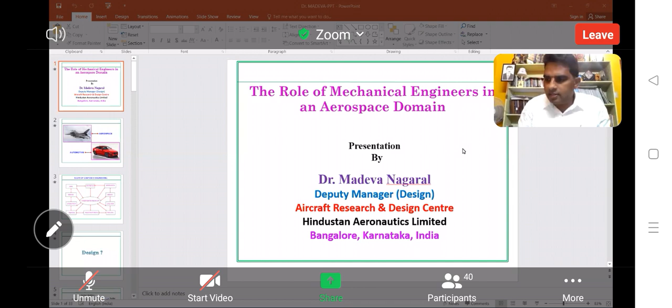You can see my presentation. As the name itself indicates, the role of mechanical engineers in an aerospace domain. If you see this term, what our mechanical engineers are going to play in the development of an aerospace product.

If you take any domain, not only aerospace, but automotive sector, or plastic domain, or any industry, from mechanical domain to the software domain, what are the different components you are seeing? Right now you are using maybe a laptop or mobile, you are sitting on a chair, or you have kept your laptop on the table. Whatever it may be, you take any component, our mechanical engineers are going to play a huge role.

So in this particular presentation, I have taken a comparison between the aerospace and the automotive sector, how our mechanical engineers are going to play a huge role to make any aerospace product, or it may be automotive sector. And whatever you are studying from the first semester to the 8th semester, different types of subjects, different types of domains.

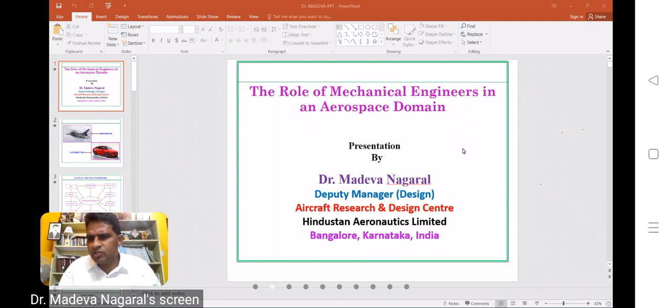How we are going to play a huge role to deliver that particular product to the customer, and what are the different steps involved, everything we are going to discuss in this 1 hour to 1 hour 15 minutes technical session. I hope this session will be useful for our young mechanical engineers, especially those who are interested in design field, manufacturing field, or testing. That means it is going to cover all aspects of the mechanical domain.

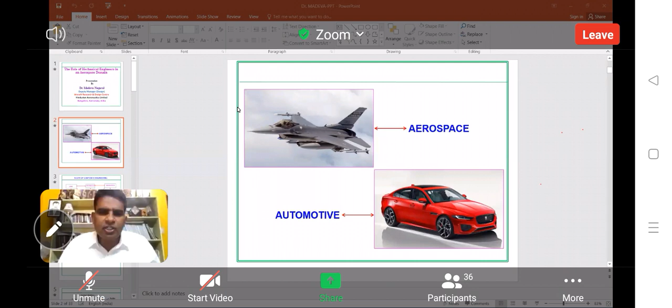So if you see this second slide, sir, is it visible? One aircraft as well as one car. Yes sir. Now if you see here, two different types of products are there. One product is related to the automotive sector, you can see this Jaguar car, and one more product is related to this particular F-16 aircraft.

Now, customer is going to give an order to a particular aerospace domain or aerospace industry in such a way that he needs these kind of 100 aerospace products with certain requirements.

For example, when you are going to shop to purchase a mobile, ultimately what are young engineers or young mechanical students going to see? They are going to see whether that particular mobile is having this much GB or not, around 256 GB, or 8 GB RAM is there or not. What about the screen? Screen size is only normal, or it may be bigger size. Like that, you are going to check. So if that particular mobile meets your requirements, then only you are going to purchase, otherwise you are not going to purchase. You are going to see other mobiles or visit other shops.

Like that, whenever a customer is going to place an order, he is going to have his own requirements. That means he is going to give his conditions in the purchase order. That means when he wants these kind of 100 aerospace products, he is going to specify three important terms.

Throughout this session, we are depending on three important terms. The first important term is the speed at which this particular aerospace product has to travel. This is one important thing.

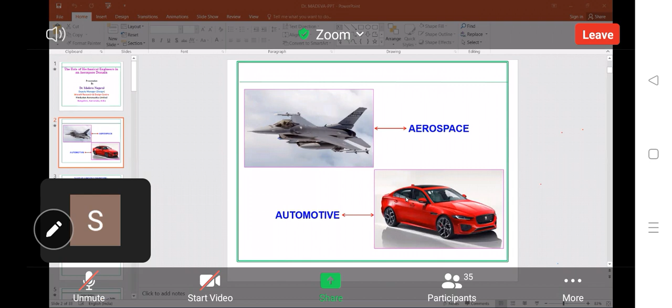If not available in that particular industry, say they have one aerospace product capable to travel at 1500 kilometers per hour, up to 8 hours, with a mass around 8000 kg. So they may have different products, but whatever the customer has asked for right now may not be there. So ultimately, at that time, this becomes the new project for that industry.

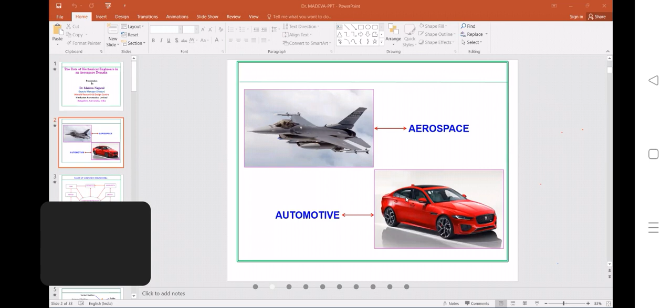How to begin, how to start this project is very important, where our mechanical engineers are going to play a very important role. Now your role is to develop an aerospace product capable of traveling 2000 kilometers per hour continuously for 6 hours, with the entire product mass not greater than 10,000 kg. Now this one is in your hand, you have to develop and deliver it to the customer.

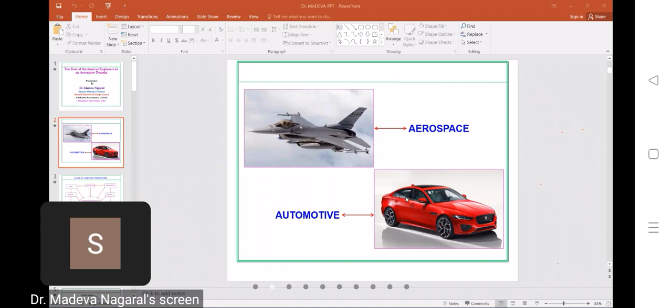Maybe the project time may be 5 years or 6 years, because aerospace products always take more time compared to the automotive sector, because whatever products are developed with respect to the aerospace domain ultimately require a lot of testing.

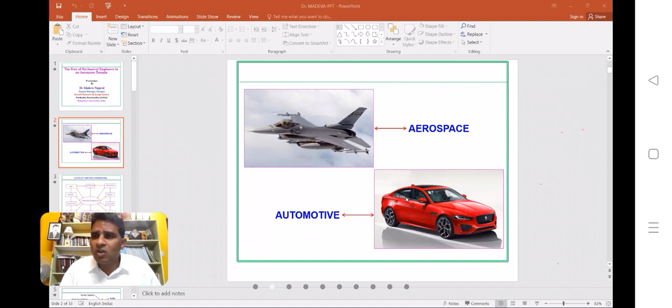We can't test simply like we do in the automotive sector, because in automotive, if something happens to the car, bike or moped, whatever it may be, we can park aside on the road and check. But in the aerospace domain, it is not like that. So a lot of factor of safety is required, and a lot of critical testing methodology needs to be followed.

So ultimately, the development of these kinds of aerospace products is right now in the hands of mechanical engineers along with aeronautical engineers. If you take any aerospace industry, out of 100 engineers, 90 will be mechanical engineers, and 10 maybe other engineers including computer science, aeronautical, electrical, or other branches. So our 90% mechanical engineers are capable of developing each and every component of this particular aerospace product.

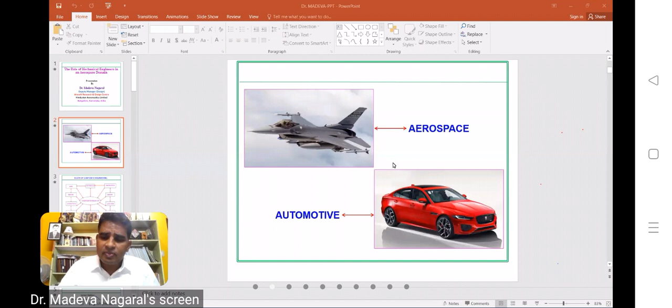That's why when it comes to the development of these kind of aerospace products, you can see this important chart. Here you can see a middle composite product, which you can think of as an aerospace product, like the F-16 we saw in the previous slide. Our aim is to develop this aerospace product, and to do so, ultimately there are a number of different parameters involved.

Those who are in 8th semester, those who just entered 7th semester, those who entered 3rd semester, and those who have just taken admission for 1st semester - you can see first semester students find this very difficult. Right now those in 7th sem and 5th sem might have seen all these terms.

Materials, as studied in material science and material testing lab, mechanics, kinematics of machines, theory of machines, and you might have linked this with strength of materials or mechanics of materials, then design 1, design 2, or design of machine elements, and a number of analysis subjects.

You can see analysis subjects - it may be ANSYS, FEM, or vibration - and meanwhile you have labs covering tooling, manufacturing processes, manufacturing, testing, inspection, repair, MBE. These are all important terms that we in industry regularly use to make this product.

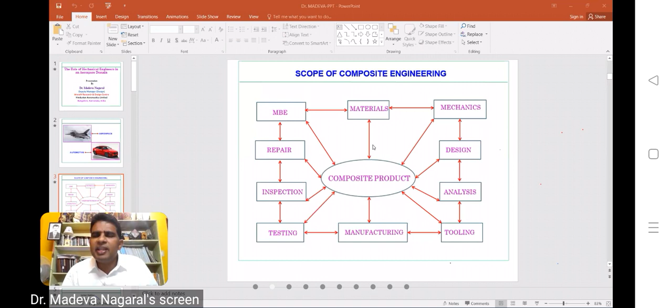Whatever subjects you are learning, from simple engineering graphics to your 8th semester, any quality related subject or any other subject, each subject has its own importance in making this end product, which is capable of traveling at 2000 kilometers per hour continuously for 6 hours. That's why you should not neglect any subject.

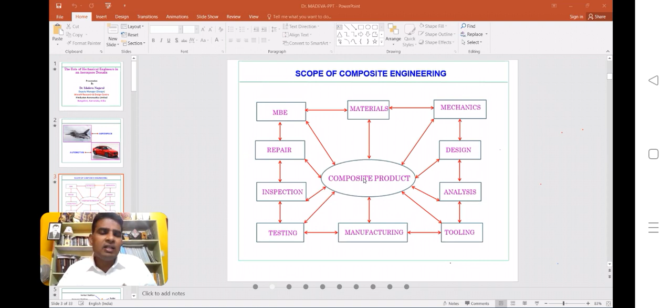You should study not only for the purpose of marks, but for the purpose of the nation's growth. Whatever you are studying right now, that same concept you are going to apply to develop these kind of components.

If you look at materials, you should know at least the density of each material. If I select to develop this kind of product using aluminum, what is going to happen? If I select to develop this fighter aircraft using steel, what is going to happen? You should be aware of that.

At the initial stage, if you start using steel, what is the density of steel? 7,800 kg per meter cube. When making the entire aircraft with steel, what is the condition the customer has given? The customer wants this aircraft supplied within 10,000 kg. If you use steel, it's going to reach a minimum of 30,000 kg.

You should be aware of this basic concept by studying important parameters in material science and metallurgy, and the same applies to mechanics of materials - what different types of loads act at different zones, and which type of kinematics I need to use to operate the landing gear of that particular aircraft.

What about the wing root fittings, where we can attach the wing root fitting, and which type of root fittings we can choose for the best design - everything depends on whatever subject you are studying. That's why each subject is going to have its importance in developing this kind of aerospace product.

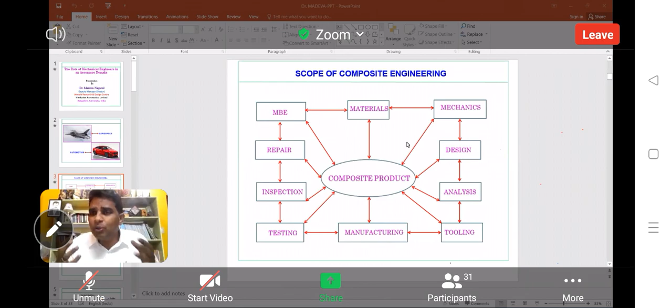Ultimately, our mechanical engineers studying this subject are going to play a huge role in making this particular product. We are going to discuss those things in the coming slides.

If you look at this particular design, as you are aware of any component design - take this simple pen design - ultimately it's based on which type of material you use or which type of design approach you take. If you see this pen tip or refill tip, when you put pressure while writing, 100% you are putting some amount of pressure on it. That pressure on the paper, with the help of this tip, should not deform it. When this tip of the refill deforms, you are unable to complete that process. You should be aware of that.

One minute, sir. Yeah sir. Excuse me sir. Recording on. Sir, is it audible, sir? No issue, sir.

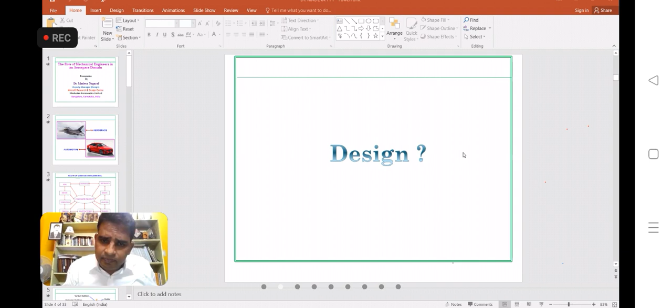Always our mechanical engineers, if they go for any interview, whenever attending after completion of their engineering, or it may be their campus time, the first question I am going to ask is: are you aware of the stress strain diagram? Then we are going to ask a lot of parameters with respect to it, because the stress strain diagram is the basic diagram of a mechanical engineer.

So he should be aware what is the elastic limit of each material, what is the proportional limit, what is the ultimate strength, what is the yield strength. So n number of parameters are there.

They should be aware of the materials commonly used, like steel, aluminum, polymer composites, titanium, or household appliances using mild steel or stainless steel material, whatever it may be. If mechanical engineers have this basic knowledge, they are going to become a good designer. This term you can see here, design with a question mark.

Why question mark? Because n number of designs are there. If you see aerospace product development which is new to the industry, at that time you can call it a complete entirely new design. If any modification is made with respect to some product, that product is there right now but is able to write for 1 kilometer.

That means you are going to enhance the performance of this product. So you may increase a little bit the diameter of that particular refill and fill a little more ink, so you are capable to write 1.2 kilometers. For example, that kind of design we can call a redesign or modified design, whatever it may be.

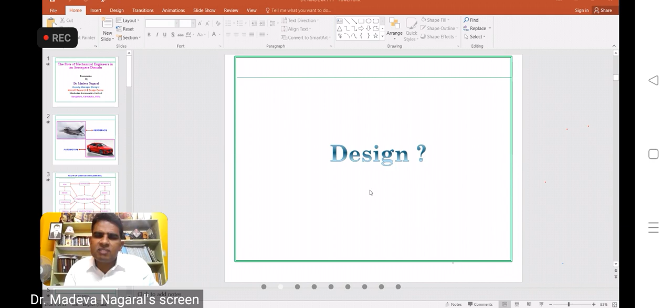That's why to develop an aerospace product which is capable to travel 2000 kilometers per hour continuously for 6 hours, how our mechanical engineers has to approach this design is very important. Always I am going to say mechanical engineers have 3 important characteristics, 3 important parameters.

First one is they should have thorough technical knowledge, which we can call technical skills. As an industry person, I am going to call it the technical skills of that particular mechanical engineer.

Second one is innovative thinking. How I can approach or which is the best way to develop this kind of aerospace product which is going to weigh lesser than 10,000 kg, and how I can approach it at the initial stages. So they should have this innovative thinking.

So once they have this innovative thinking mind, along with technical skills, apart from that one more important thing directly related to product development, which is nothing but research mind. Innovative thinking, then technical skills - when these two are present, they have to apply their research mind. Once they apply the research mind, they become capable to develop this kind of aerospace product, or this kind of automotive component. So ultimately, if you see this one, this is the one commercial aircraft.

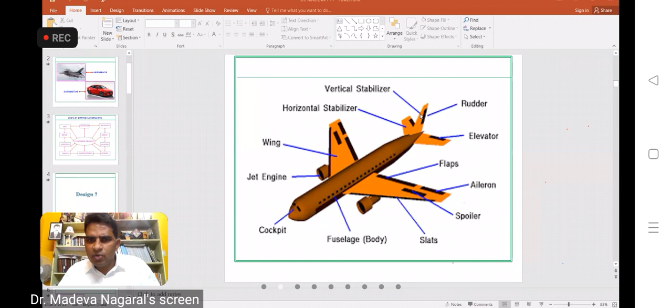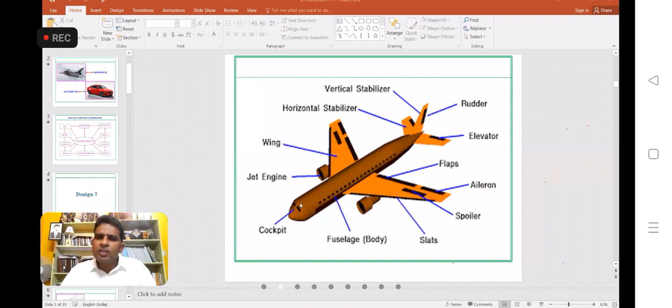So this we are going to call it as a fuselage. This we can call it as a wing, and here entire thing we can call it as empennage. This is the vertical tail, horizontal tail. Here engine is there. So ultimately, along with that inside, n number of components will be there, and here crews are going to sit.

So your aim is to develop this kind of product. When you want to develop this kind of product, ultimately you will start thinking how to approach design phase, how to initiate this kind of project. Simple example I am going to take.

Whenever you are having a 30 by 40 site, for example, this is your site, and you want to construct a house in this site. So what is your first step? Are you going to build an entire wall like this? It is not going to become a house. It is going to become an auditorium, or a seminar hall.

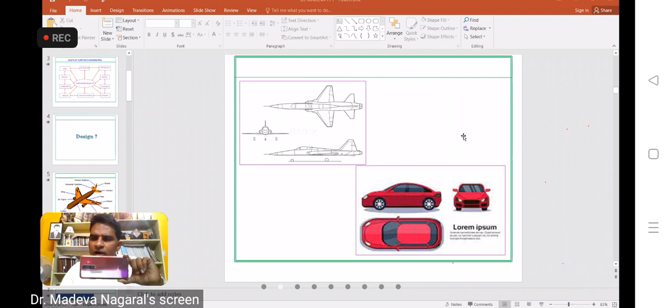So you have to have a clear picture of where you should have the hall, where you should have the dining hall, where should have kitchen, bedroom, and the other remaining parameters which are required. So all the things we have to represent with the help of some kind of diagram. That diagram generally we used to call it as a layout, or we can call it as a blueprint, as all of our mechanical engineers are knowing. Hence, to initiate any construction of house or anything of construction, ultimately you are going to have a blueprint.

Like that, in the aerospace product, or it may be automotive sector, anything, if you want to initiate your design phase, I'm not going to say building, I'm not going to say direct manufacturing. Direct manufacturing takes minimum after 4 to 5 years, because the aerospace domain is like that. So this is the beginning of your project.

How to initiate your project as per the customer requirement. You have to supply the aerospace product which is capable to travel 2000 kilometers per hour continuously for 6 hours, and the entire product should not weigh more than 10,000 kg. Keeping this in mind, with your innovative skills, with your technical skills, and by applying the research mind, you are going to draw what is the maximum length I can have to travel with a velocity of 2000 kilometers per hour, and meanwhile the length should be such that it should not weigh more than 10,000 kg.

So like that, you have to define important dimensions of that particular aerospace product, how you are going to give dimensions during your blueprint, during the construction of your house. Same thing, this is the initial step in the aerospace product, or it may be automotive product, to give the dimensions of that particular product. That means defining important dimensions of that aerospace product takes place at the initial stage. That is very, very important.

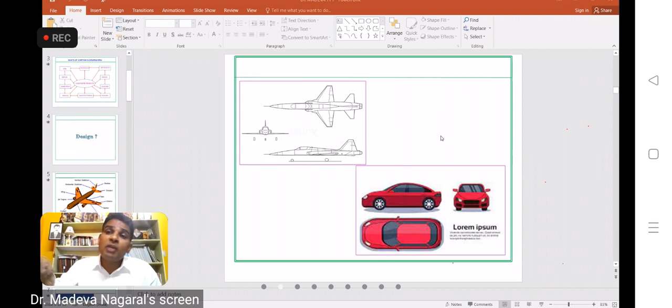How you are going to define all these dimensions? This is one more important question, because when you are constructing the house, you are going to define all these things with the help of a blueprint.

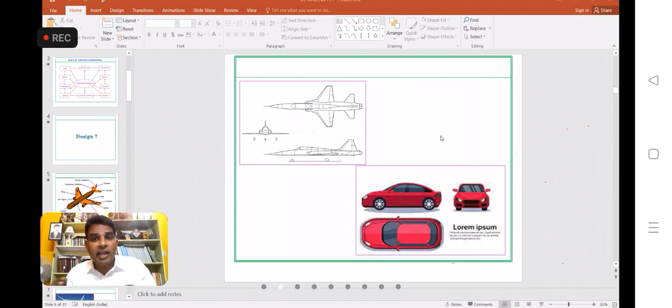Your subject right now, CAED, computer aided engineering drawing. So this computer aided...

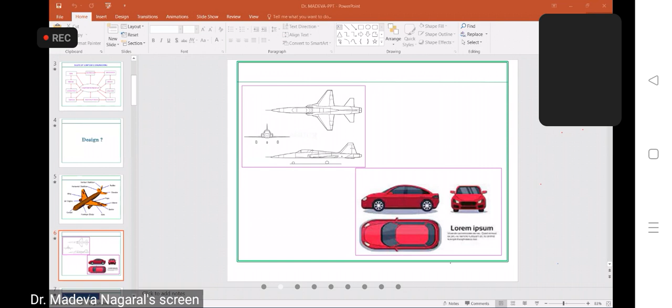In the aerospace domain, people are going to use to draw this kind of drawings. If you see here, we are going to call this one as a front view. Always, whenever we are seeing the aerospace product like this, we call it as a front view, not this is the front view for us. This we can call it as an end view always. When we are seeing from nose to rear, we are going to call it as an end view. Here you can see the end view, and this, as we can see, entire top surface of that aerospace product, we can call it as a top view.

Why is representation of this view very, very important at the initial stage? Why is this three-view diagram finalization very, very important in the aerospace product? This is one more important point, because all the dimensions we can represent of that particular aerospace product, which is capable to travel with a velocity of 2000 kilometers per hour continuously for 6 hours, with the help of this diagram.

We can see overall length from here to here, we can represent in the front view. Same thing, we can see the wingspan from here to here, we can represent in the particular top view. And meanwhile, we can see at which track, what is the maximum track, or we can call it what is the maximum runway required for this kind of aerospace product.

This we can call the track length from landing gear LH to landing gear RH. Meanwhile, another important parameter is the distance between the nose landing gear and the main landing gear. As an aerospace product term, we call this the wheelbase length.

So all these things are very important to initiate any aerospace product, or even in the automotive sector. Here you can see this car also. What is the distance between the front wheel and the rear wheel? Whatever people are sitting here within these two wheels, because maximum load will be within this range only.

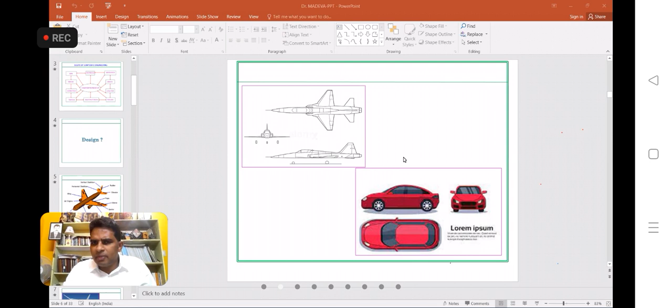This is not only in the aerospace product, this same is applicable for any automotive sector, or plastic domain, critical components, or whatever. So whenever you are going to draw this kind of diagram, whether it is sufficient to make any aerospace product, this 2D diagram, you can call it a line diagram, simple line diagram.

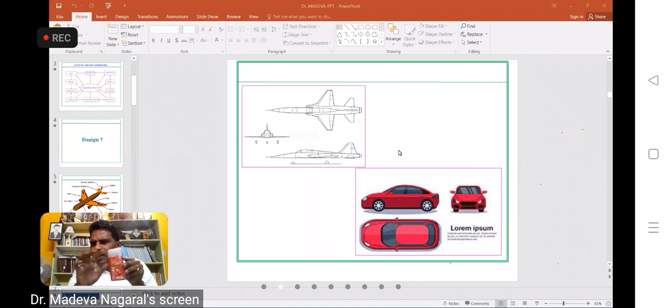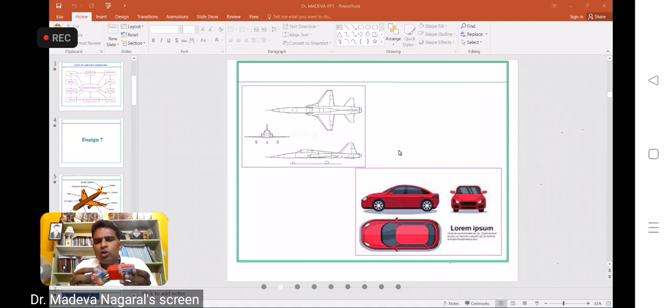So whether this rectangle or triangle is sufficient to store this kind of crayons within this box? It is not possible to store this kind of crayons within this box. You should have the volume. That means whenever you want to fabricate or produce any kind of component, you should have volume.

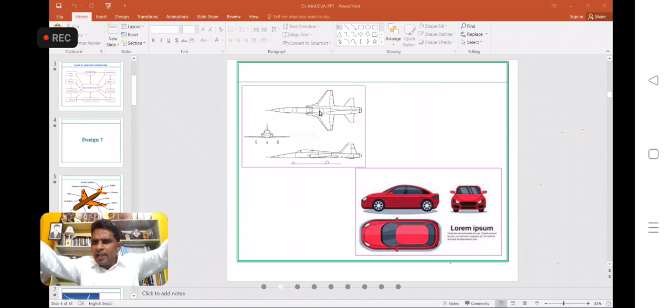Then only you can start filling n number of components which are capable of making this aerospace product a flying agent. Then only it is going to fly. If otherwise you make a paper aerospace product and hand it over to the customer, it is not going to fulfill his requirement.

Conversion of this particular 2D diagram to a 3D model like this is an important stage of any aerospace design or product development, or automotive sector development, because this will give you a clear picture of what is the volume of this aerospace product, and how the outer surface is going to look, and whether it is capable to travel at a velocity of 2000 kilometers per hour or not.

This outer geometry, usually in the aerospace or automotive sector, is called the outer geometry. If you take a water bottle, a simple box shape like this, is it capable of traveling at 2000 kilometers per hour? No, this kind of shape is not suitable because it will have a lot of drag. So how do we improve or overcome that drag?

That kind of activity takes place during this conversion of the 2D diagram to the 3D model. Once they make the outer geometry, they are not going to see in this step what you are going to fill inside - they are not going to bother with that. Right now, whatever outer shape is there, we need to check if that outer shape is capable of traveling at a velocity of 2000 kilometers per hour or not.

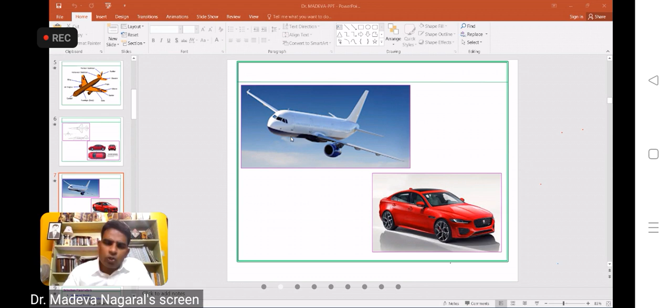Once again, you have to fill n number of components. So after filling n number of components in a digital way, I am telling - initially all these activities take place in the aerospace industry, or it may be automotive industry, at a computer level or a system level.

Once you have that confidence, then detailed design will take place. Detailed design is nothing but you are going to start fabricating each of these components. That means to make this outer boundary of this particular aerospace product, you are going to develop one structure, and in the structure so many ribs will come, so many parts will come, like a skeleton of our human body - how our human body has developed, a number of ribs are there, and how the connecting members are there in between.

So like that, this aerospace product we need to make, and we are having top skin, like that you have to make skin with the help of some kind of sheet metal work, with around 10 different components. To complete this entire product, you have to develop more than 1 lakh different parts, where our design engineers are going to play a huge role.

So you have to adopt which type of design to make one simple component. Which mechanism is involved to make the landing gear? Which mechanism is involved to fit this particular wing to the fuselage? Whether it acts as a cantilever beam, and when it acts as a cantilever beam, what about the bending moment? What about the shear force? Everything you need to think about.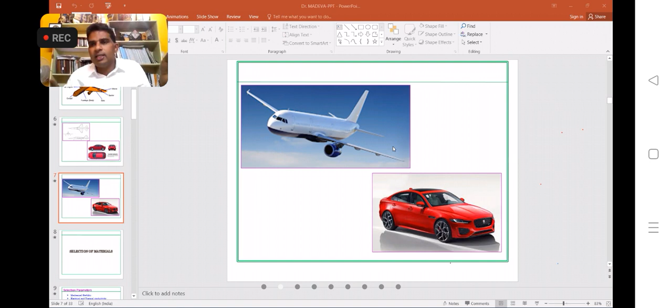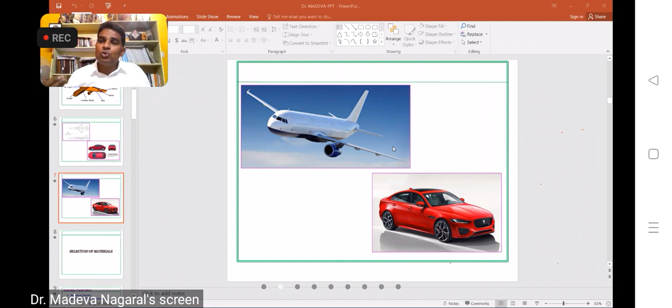Simply designing doesn't mean you just go and fit it here. Not like that. You have to evaluate everything and do the calculations. With the help of those calculations, you have to make it a systematic design. Along with that, you have to choose proper material selection for any component. That is very, very important.

If you see this next slide, selection of materials is important because your duty is to develop more than 1 lakh different parts. All the parts you are going to assemble with the help of some kind of sub-assemblies and major assemblies, and the entire product you are going to build ultimately at a later stage.

When you are making at the part level, take this crayon for example - when it starts breaking, what is the use? So like that, when you put all broken crayons into a box, the end use, the end application, is not going to be fulfilled. That's why, at the part level itself, you have to design in such a way that this particular part should not fail.

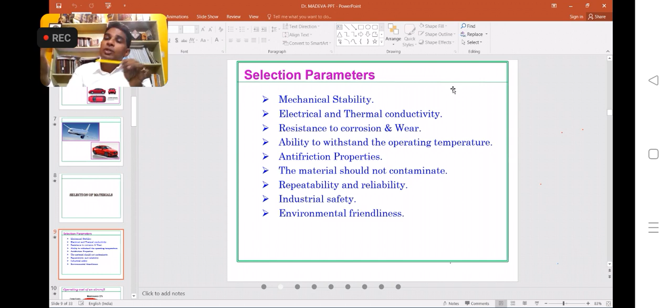When the part is not failing, then you need to check the assembly also - the assembly should not fail, and the major assembly too. You have to think about the entire aerospace product being developed. So at the part level, you should select a suitable material, and that material should have mechanical stability.

Mechanical stability, as I explained in the previous example with writing a pen, means it should have a particular amount of resistance to deform. And what about the strength? What about the stiffness? You should know everything at least for the basic material, including electrical and thermal conductivity.

Simple example: when you are going to make a particular part which goes inside the engine, if you select plastic as the material, is it going to fulfill your requirement? No. Engine temperature will be very high, maybe around 900 to 1000 degrees Celsius. If you use a plastic compound, it is going to burn. If you use aluminum, it is going to waste away.

So you should have at least basic ideas about materials, because the entire 1 lakh components are in the hands of mechanical engineers. Along with design knowledge, mechanics of materials knowledge, kinematics of machines knowledge, and manufacturing technology, you should be aware of material science also.

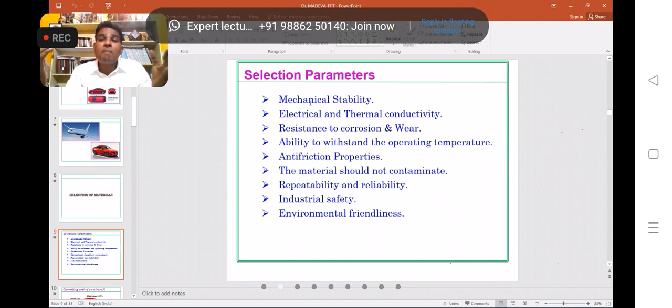Only then can you become a good engineer, so that whatever part you develop is not rejected at a later stage by quality people or inspecting agencies. If you use aluminum instead of titanium for the engine hot zone, ultimately they are going to reject it, saying: how did you design this, man? Your design is not good. Go change the material and send the redesign once again.

Because in industry, this particular part - when it goes to fabrication, it's not simply that I design it and go fabricate it, not like that. For a simple piece of steel, there are a lot of inspection agencies and a lot of approval departments. They have to approve it, and they are going to check each and everything. It is not just like the automotive domain.

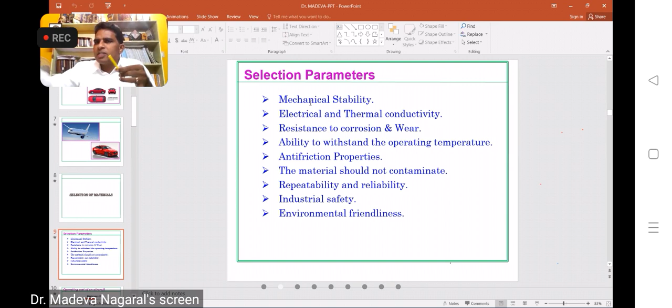So it's not simply that if one steel doesn't work, I'll just take another steel instead. Not like that. Each and every part of that particular aerospace product has to be released through some kind of design quality or design-related group. Only then is it capable of being manufactured, and ultimately it goes onto the aircraft. So there are different terms involved.

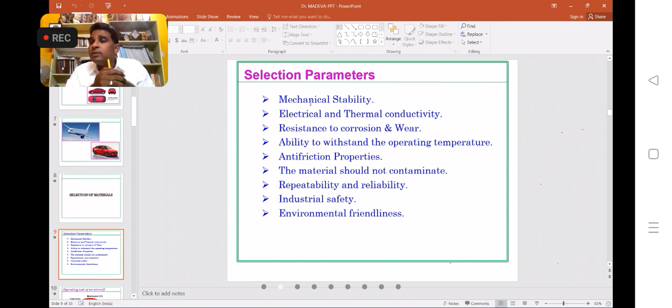We always define the life of an aerospace product in terms of flying hours - that is 10,000 flying hours, or it may be 30 years. That means whatever aerospace product we hand over to the customer, it should be capable of traveling a minimum of 30 years or 10,000 flying hours, whichever comes first. At that time, they are going to ground the aerospace product.

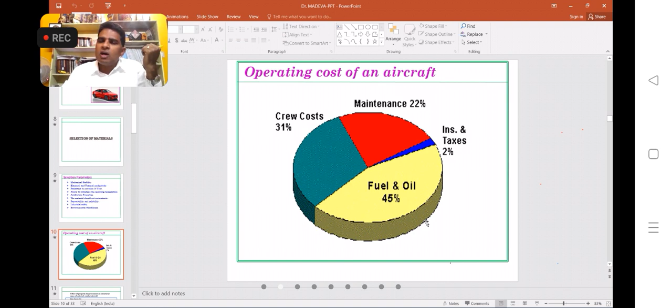For 30 years, when you fly that aerospace product, what about a 1 kg rise in mass? It's going to consume 1 liter extra. Like that, it adds up to more than 1 crore liters of gasoline. So ultimately, they pay crores of rupees extra just for fuel charges. That's why they always worry about the weight, because efficiency is directly related to the weight.

So how do we define or fabricate this? As you are aware from material science, we always think about low density material and high strength material. When you reduce the density, your strength, fatigue, and other parameters should not come down.

When instead of aluminum you choose polymer based composite, what about the density? Density is 1400 kg per meter cube. Then what about the strength?

If strength is not fulfilling the requirement, what is the use? Although you have made an aircraft with polymer composite, when it's traveling in the air, it is ultimately going to fail. What is the use? Ultimately that is of no use.

So you choose material in such a way that density comes down and strength increases. Generally, what we call the strength to weight ratio should be very high. That's why you should not neglect the material science subject or any theory subject. Whatever subject you learn from the first semester to the last semester, you should give the same importance to all the subjects.

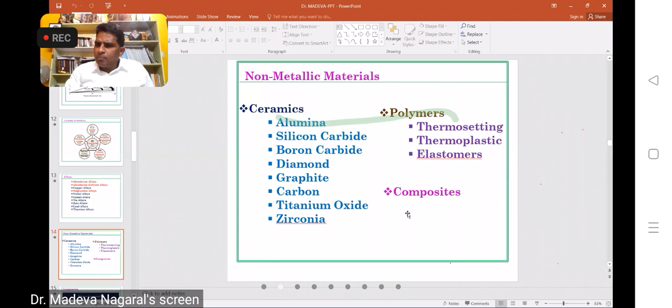If you see here, aluminum alloys - what we use for aerospace materials, aluminum alloys are used more. And next, a number of different composites are there. Right now, the entire aerospace product development is mainly based on composite materials. Composite material is nothing but, as we know, the polymer based composite.

We can see this Boeing 787 aircraft. Whatever blue picture you see here, this blue part is made up of composites. Right now, in commercial aircraft, or the automotive sector, or the aerospace sector, people have started using this polymer based advanced composite material more.

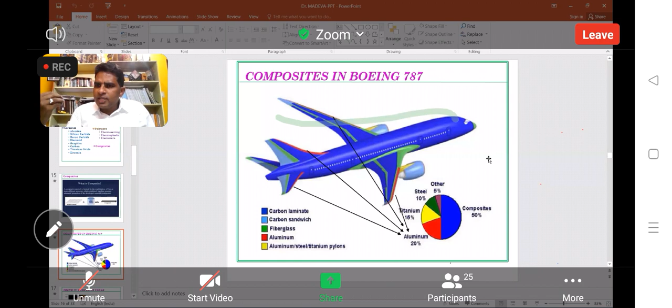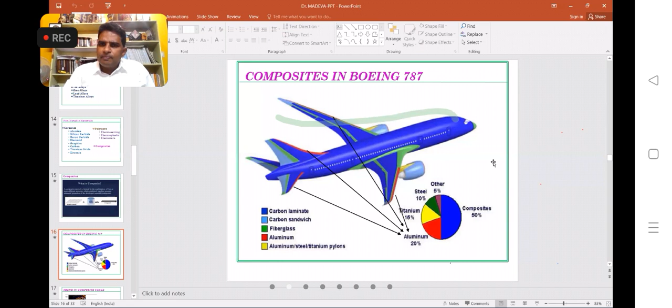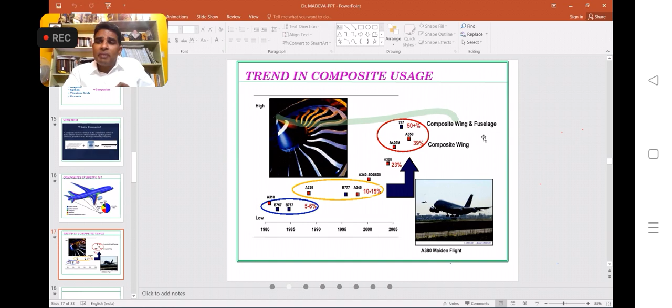Even now, indigenously, we have not developed composites for aerospace applications. That's why young engineers need a research mindset to develop these composites. In 1980, composite usage was low, but from 2005 onwards, we started using advanced composite materials for more than 50% of structures. This usage has to increase further for lightweight bodies. This is a hot area where faculty and young researchers need to concentrate on developing polymer-based composites for aerospace applications, aiming to make them end-use products, not just for research or publications. The ultimate goal should be an end product. That is very important, which is why I am highlighting this.

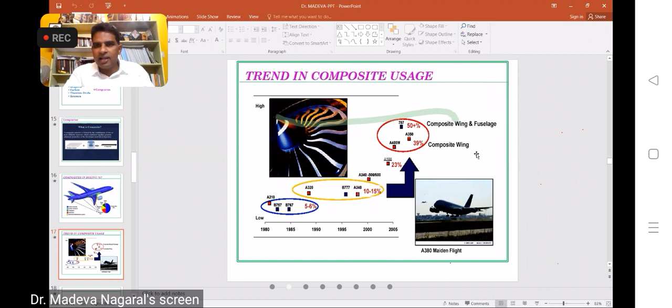So once you have a thorough idea, conceptual design, detailed design, and CAD models of the product ready, you start developing components using CNC machines, lathe machines, or other equipment. Once all parts are made and assembled, how do we prove that these parts and assemblies are suitable for direct use on an aircraft or aerospace product? So what is important?

Testing is important. Whatever you study in material science - materials testing lab, design lab, ANSYS lab or CAE lab, heat transfer labs, and many other labs - all these labs play a huge role. As industry professionals we may follow high standards, but the basic concepts we follow in any industry are directly gained from academic subjects. The academic labs you study are very helpful because the procedures and methods remain the same, even though standards like Bureau of Indian Standards or ASTM may differ. Whatever basic concepts you study, those are what you use in industry.

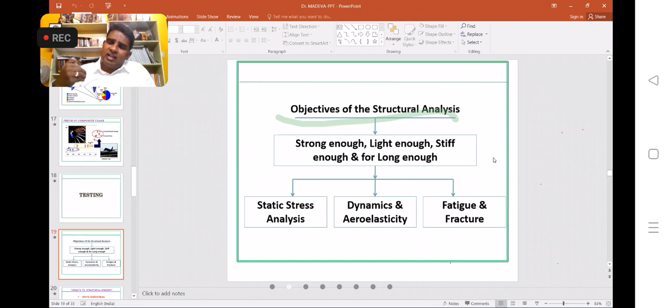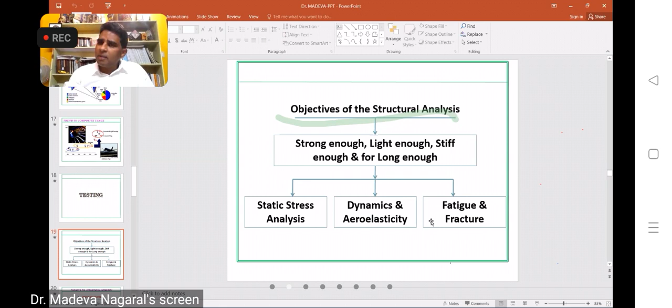In this next 10 to 15 minutes, I will wind up by covering how testing is very important for making any aerospace or automotive product. There are different types of testing: static stress, dynamic stress, or fatigue testing. Almost all components, whether in an aircraft or helicopter, will fail after certain years. Why does it fail? Due to these reasons, which you can see in this slide - these are the reasons that cause any product to fail, such as static load stress.

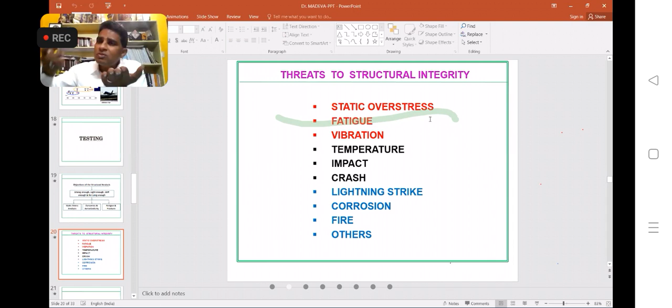A simple example of static overstress: there is a tray on which I place a battery of an aerospace product weighing around 50 kg. This tray can be considered as a bracket, made of aluminum. I keep this bracket in place for around 30 years, since the life of this aerospace product is up to 30 years. Will this bracket remain the same under static overstress? This could be due to surface-to-surface contact between the battery and the bracket, or due to chemical interactions between the base material and the battery. So which material should I choose for this bracket, and what thickness is needed to ensure it can bear this 50 kg load over 30 years?

The thing you need to decide is at the initial design stage only. When you have mounted the battery, and that particular aerospace product is flying, then afterwards if some disturbance happens due to vibrations or fatigue life and other things, and you need to change it, then it is time consuming. That means your design is not appropriate, your design is not good. So at part level design only, our mechanical engineers have to think.

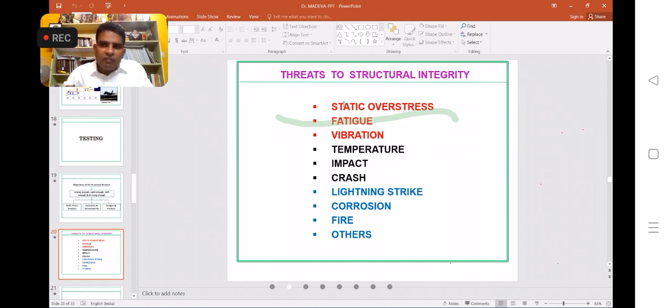Who has to take the blame here? The blame has to be taken by our mechanical engineers only. That's why if they have thorough knowledge about different types of loading conditions, different types of strengths, different types of mechanics, and different materials, and with all these combinations they develop that particular tray or bracket, then they can mount that battery over a period of 30 years with no issue.

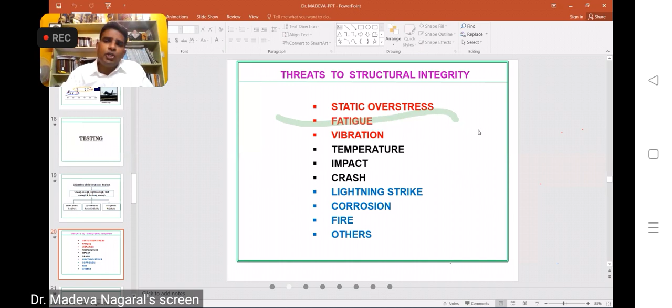So different loading conditions, different testing methods we need to follow to prove a particular product. Either it may be analysis results, or conventional testing results like tensile test, hardness test, or it may be fatigue test, whatever it may be.

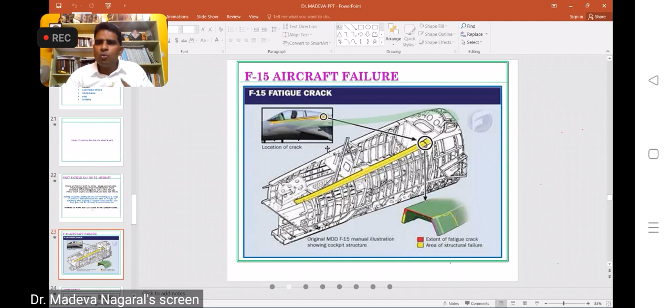So I'm going to cover fatigue particularly, because if you see any aerospace component like this, this is the fuselage. We can call it the center part. You can see this image - this is just like our body. Whatever you're seeing here is just like how we're looking right now. When you are scanning, your body looks like this - whatever ribs, parts, like that, your skeleton is seen. Same thing when you see the aerospace product like this.

We don't know what is going to happen when we fall from something, when we are playing, or whatever it may be - some injury may happen. How are you going to check that injury? By using scanning or x-rays, whatever it may be. Same thing - some kind of cracks initiated within the body of this particular aerospace product, how do you judge that, because this cover is there and inside something happened, we will not come to know. When we don't come to know, ultimately what will happen?

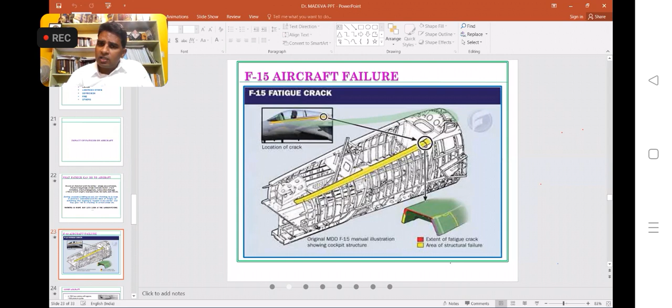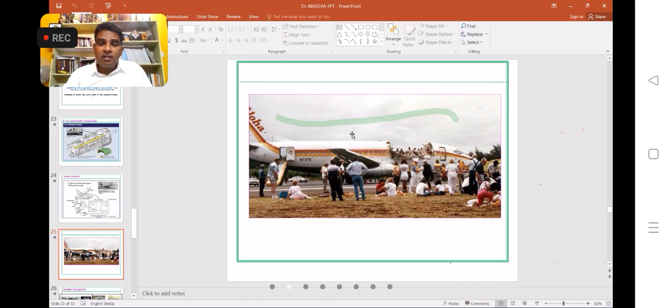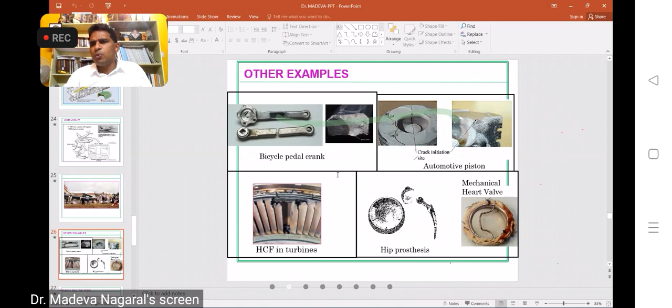That's why this testing is very, very important. As we do design, as we do manufacturing, after that to prove whether that material is suitable to use in this particular aerospace product or not, testing is very, very important. That's why if you see n number of components, mainly failure is due to fatigue life, because almost all the crashes or aircraft failures we see all over the world right now are mainly due to fatigue life.

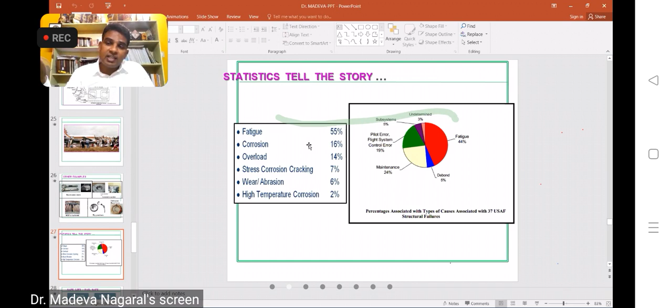Because fatigue is very, very important - we can see repeatedly applied load which can cause cracks very easily. That's why our mechanical engineers should be much aware of these kinds of components, and they should know which components out of 1 lakh are critical and non-critical. You have to judge everything - if it is critical, what factor of safety you need to apply, what design you need to initiate, which type of material to choose for 30 years. Everything you should be aware of - that is very, very important.

So in fatigue life design, industry people consider both safe life and fail safe. Safe life means up to 30 years or 10,000 flying hours, that particular aerospace product should not fail. Take the landing gear of an aircraft - it is going to land more than around 10,000 times during a period of around 30 years, for example. If it is going to break when landing just 100 times, then your entire aerospace product is going to collapse. This should not happen - from the customer's point of view, they are not going to accept this.

That's why you should think - if I am going to land 1,000 times, ultimately which type of material I have to choose, what about the dimensions, what about the robust design or factor of safety I need to follow - everything you need to think about.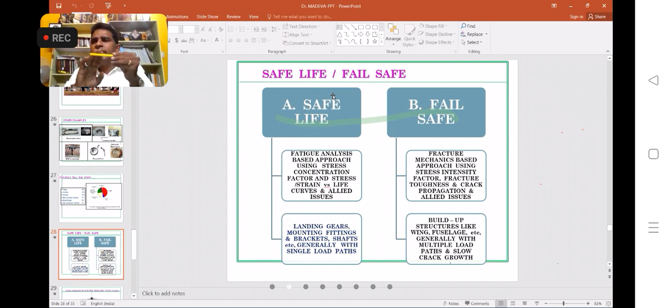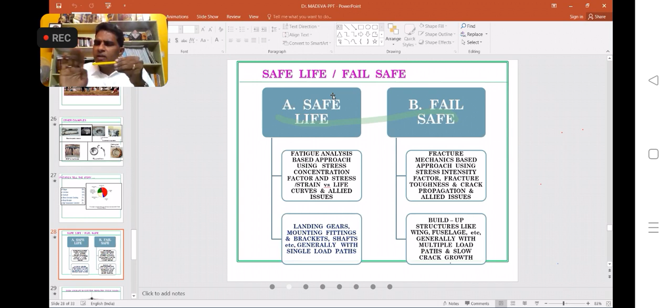If this is like a body or skin, at that time for fail safe, some kind of crack occurs on the surface. That crack you can patch with the help of some instruments or some patches, whatever it means, and that we can call it a fail safe.

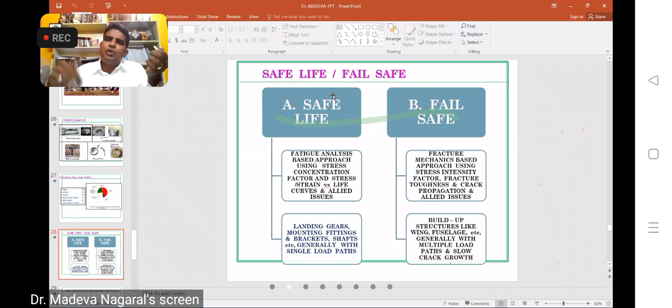Why I am going to highlight this is that our mechanical engineer should be aware of this while designing any component, whether it is a small mobile, a small pen, the automotive sector, or any water bottle. You should know exactly which type of load is coming, which type of material we need to choose, and which type of analysis I need to do.

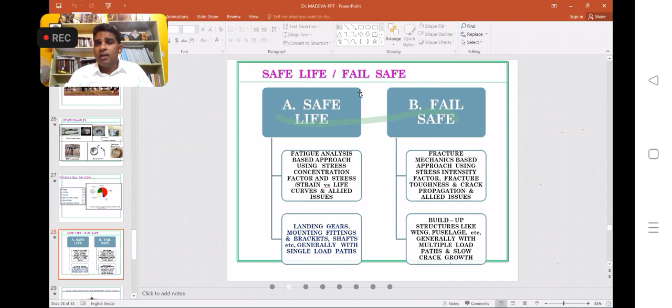If I am going to take the thickness, if I am sitting on this chair, and I choose the thickness of this chair as just 1 mm, I should be aware whether it is capable of taking 70 kg on this chair or not. All these things are very important, where our mechanical engineers should be aware at the initial stage. Then only you can hand over a successful product to the customer.

If you see here, any aerospace product, when it is traveling on the ground, that is on the runway, it is traveling with a velocity of 400 kilometers per hour. Now your aim, when it is coming into the air, is that it should be capable of traveling 2000 kilometers per hour. When it is landing, once again 400 kilometers per hour.

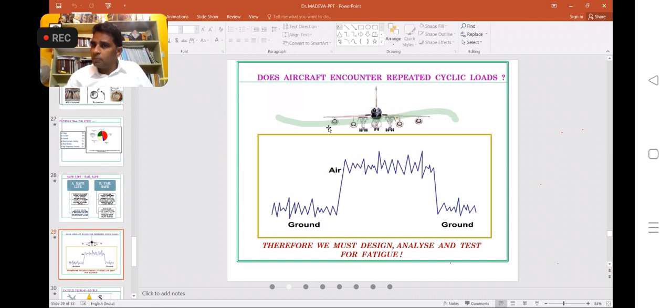Here with different types of loads we can see on the surface, sometimes heavy load, sometimes lesser load. Like that, fluctuating load is hitting the surface of the aerospace product. At that time it should not fail. It should not fail means you should have thorough testing.

So whenever you have developed this kind of product, like an aerospace product, at the part level, you can see a simple part. Take a best example of this particular pen. You have developed this tip of the pen, and when you are assembling this tip, as an individual part, the spring is hitting inside. When the spring hits inside this portion, ultimately it should not fail. That you need to check.

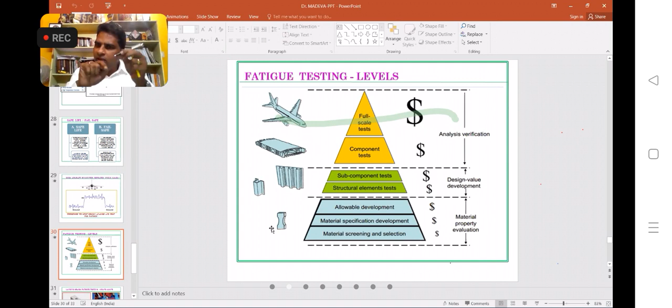When it is hitting and failing, when you have assembled everything and start writing, and at that time it fails, it means whatever design you have made, you have to redesign everything. That is time consuming. It should not happen. That's why you need to check at the part level first.

When you have clubbed this tip of the pen with this black portion, at that time also you need to check it as a sub-assembly level. And when you have added this and this as a major assembly or main assembly, at that time also testing is required based on exactly where we are using it and where exactly this component or part is coming. This type of different loads acting on this part, everything you should be aware of, and you should analyze those kinds of loads and those critical parameters. Then it will be a successful product.

So if you see here, this is the wing of that particular aerospace product. In the real time aerospace industry, people are going to check this product, what we call the prototype vehicle, meaning before full production, there will be a prototype vehicle. They are going to check this wing alone.

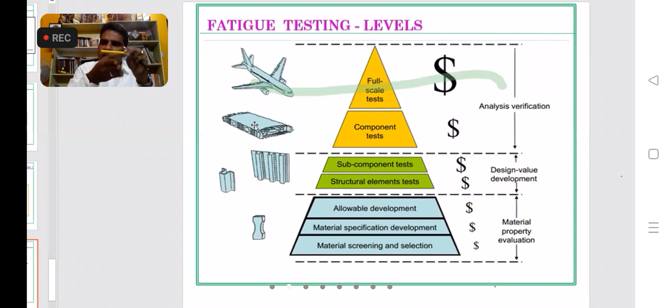When they check this wing, they will apply a lift load of 10,000 kg. How much weight is coming on this particular wing? Whether this wing is capable of taking 10,000 kg or not. If it is 10,000 kg total, it has to lift, meaning at minimum one side it is going to distribute 5,000 kg. Whether this surface is going to take 5,000 kg or not, it should not collapse.

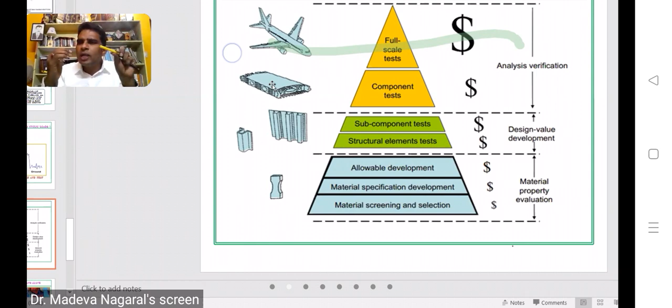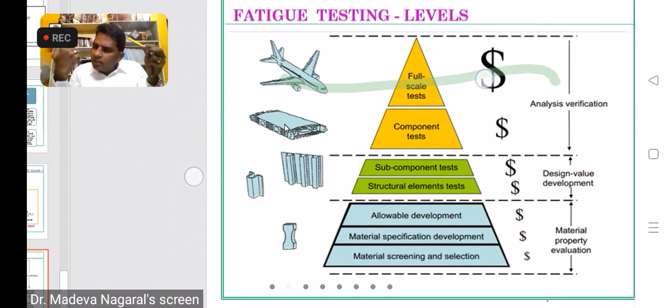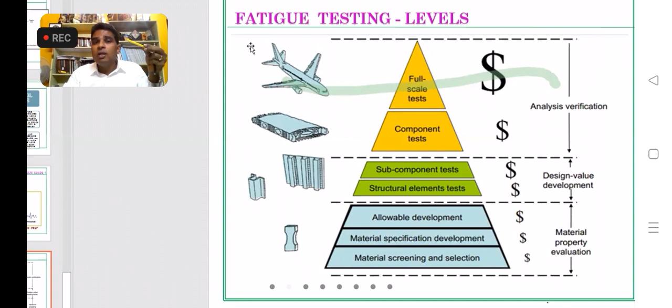Then how do you do that? If it is collapsing as a single wing, no issue. When it is collapsing as an entire product, that is useless. So let one particular wing be allowed to be destroyed, and prove whether it takes this particular load or not. So at the entire aircraft level, before flying any product, entire aircraft level testing is going to take place.

They check this with the help of loads. Here you can see dead loads, and these loads are attached with strain gauges and sensors, and data is retrieved. When it is traveling at 2000 kilometers per hour, our wing should not detach. So this kind of testing will be done, because all these testings are done by our Royal Mechanical Engineers only.

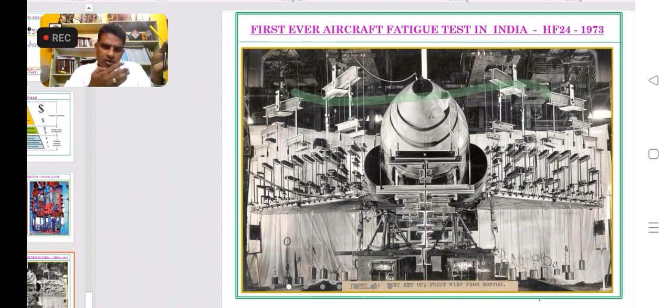So from the initial stage, from the customer order to the end product, this kind of product is made. Our Royal Mechanical Engineers play a huge role by using elements of mechanical engineering subjects, drawing, FEM analysis, manufacturing design, mechanics of materials, kinematics - all these subjects we use to make this kind of aerospace product.

Once testing is over and everything is done, a lot of procedures are available to make this kind of aerospace product. Those procedures, defined during developing the prototype vehicles, are followed for series production. Ultimately they do the series production, and finally hand over this aerospace product to the customer.

So in each stage, it is important to have our mechanical engineers' role. That's why we always call our mechanical engineering students as Royal Mechanical Engineering students.

Not only this, whatever cycles are involved end to end to develop these products, whenever some software requirement is there, our mechanical engineers can learn software like Java, SAP, or some programming language like C++, whatever it may be. They can become software engineers, but a software engineer can never become a mechanical engineer.

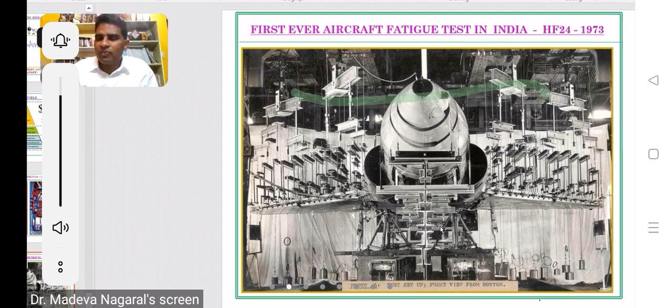Because they are not going to operate a lathe, they don't know how to program CNCs, and they don't know the design subject - design equations, bending moment equations, Euler's formula, deflection equations. It is very difficult for them to calculate bending moments or shear force diagrams. So a mechanical engineer can learn software and become a software engineer, but a software engineer cannot become a mechanical engineer.

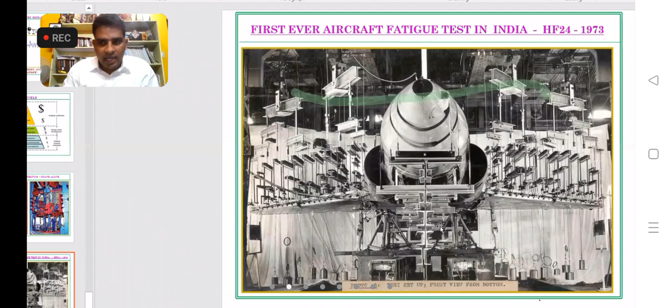That's why we should always be proud to be a mechanical engineer. I am going to end my session here. If any doubts or clarification is required, you can ask me any questions also.

Is it okay, sir? Sachidan sir? Sadan sir? Yes sir, yes sir, it is okay sir. Absolutely fine, very nice presentation. I actually required 2.5 hours for this session, sir. As you said, maximum 1 hour, that's why I wound up in a little faster manner.

We can have one-to-one interaction with the students in live sessions, sir. If possible, one time I will come to this Vidyaniketan College of Engineering, and we can have interaction with them there. It would be better to discuss with the Royal Mechanical Engineers in future if possible. Yeah, that would definitely be a good idea, sir. We will see some other time, maybe very soon.

Yes, I think this online session is not much convenient, especially for such subjects, sir. Like I also don't know, sir, whether whatever I am speaking about aerospace, which is very critical, students are listening or not, and what they are doing is very difficult to tell. If one-to-one interaction is there, I can drag this session up to 3 hours. It will be good for students, and we can draw shear force diagrams and everything, showing how we utilize our mechanical subject in real time.

That we can explain, and students can feel they are learning a very good subject like this. You can just bring in some taste of flight without formulae. I think yes, you can, yes - give good exposure so that it can be encouraged. Yes sir, Sadanand sir.